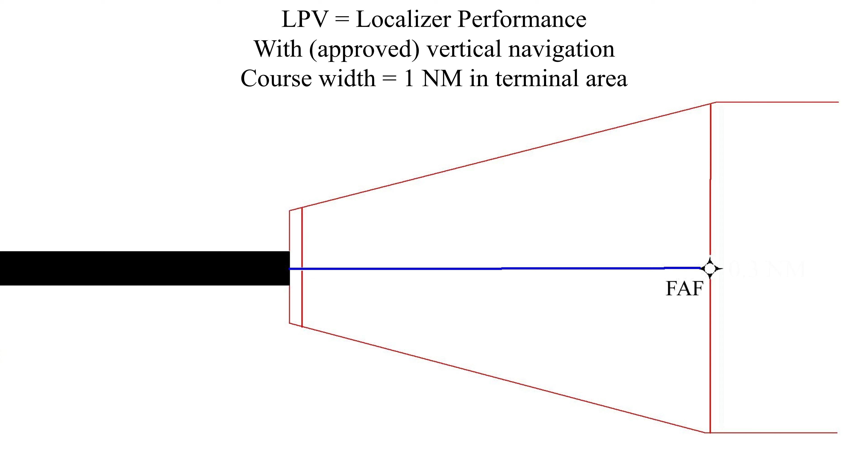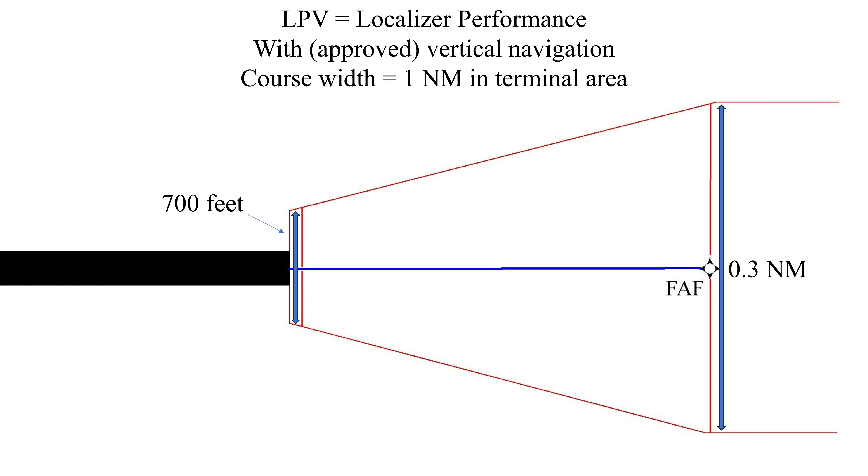With LP lateral guidance, the course width narrows as you get closer to the runway. It starts at a width of 1 nautical mile when you're in the terminal area, which is any time you're within 30 nautical miles of the departure or destination airport. It narrows down to 0.3 nautical miles either side of the course when you get within 2 nautical miles of the final approach fix. At the final approach fix, it gradually narrows to only 700 feet wide at the runway threshold. This mimics the sort of sensitivity you'd get flying an ILS localizer, hence the term localizer performance.

Since you get very precise lateral guidance to the runway, as well as a GPS-generated glide path, this makes it very similar to the guidance you get on an ILS approach. So you basically fly it the same way you would fly an ILS approach, following the lateral and vertical guidance from the GPS down to a decision height, where you either get the runway in sight and proceed to a visual landing, or you don't and execute the missed approach.

With this precise lateral and vertical guidance all the way to the runway threshold, LPV approaches usually have minimums very similar to that of an ILS, with a decision height as low as 200 feet and visibility as low as 1,800 RVR or 1/2 statute mile, depending on the runway and approach lighting system available. Like an ILS approach, you can fly this by coupling it to the autopilot and/or flight director, or hand fly it using raw data.

To demonstrate flying the approach, we'll conduct a short IFR flight from Pine Bluff Grider Field in Pine Bluff, Arkansas. The identifier for that airport is Kilo Papa Bravo Foxtrot, to Stuttgart Airport in Stuttgart, Arkansas. The identifier there is Kilo Sierra Golf Tango. We'll plan to fly the LPV RNAV GPS approach to runway 36 at Stuttgart.

After departing Pine Bluff, we'll navigate direct to Hokum Waypoint, which serves as both an initial and intermediate approach fix for this approach. We'll assume that we request and get clearance to fly the approach straight in without flying the procedure turn at Hokum, using it as an intermediate approach fix.

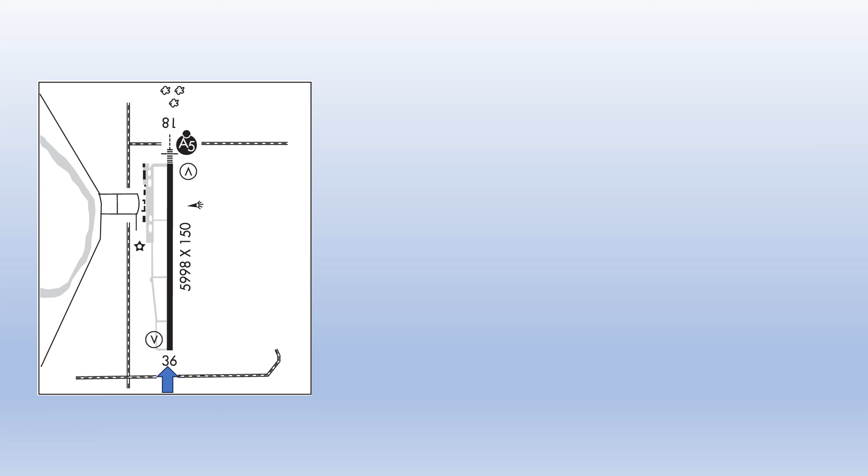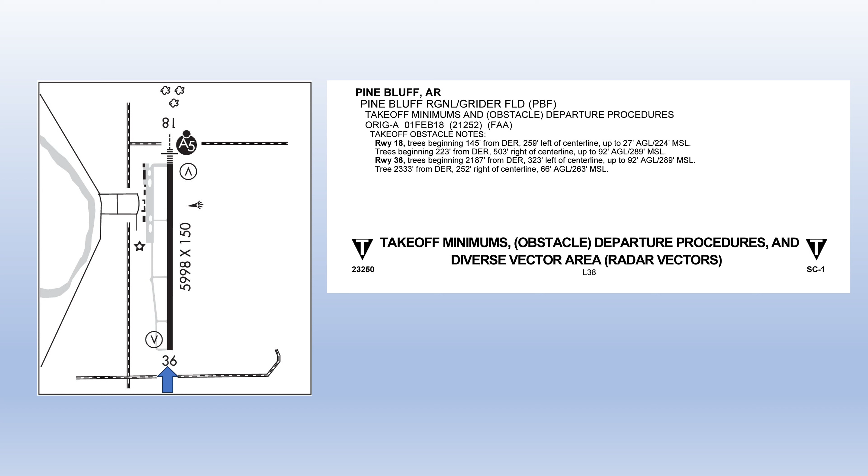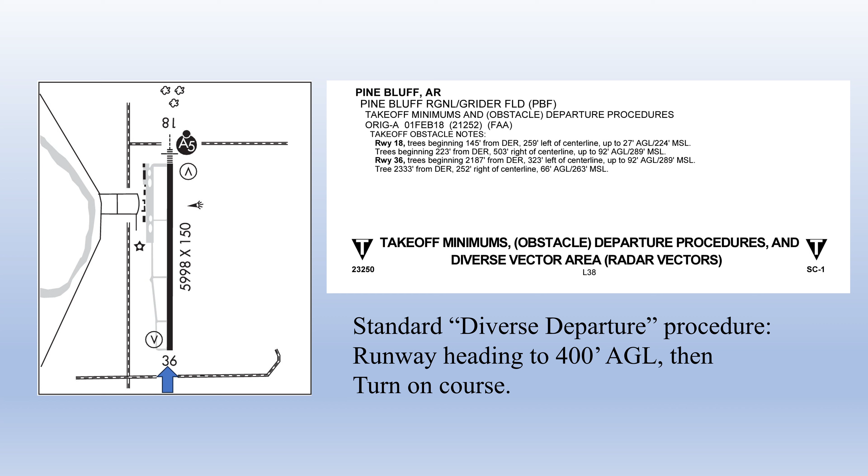We'll plan to depart runway 36 at Pine Bluff. We've checked the takeoff and departure procedures for Pine Bluff. There are takeoff obstacle notes, but no special departure procedures and no takeoff minimums. So we know we'll be safe using the standard diverse departure procedure of flying runway heading to 400 feet AGL before making a turn on course. We'll assume the weather at Pine Bluff Airport is good enough that we can get back in and that we feel comfortable departing.

The weather at Stuttgart is reported as calm winds, 1 mile visibility, ceiling of 300 overcast, temperature and dew point of 15 degrees C, and an altimeter of 2992. We'll assume that we filed an alternate for the flight and that it is a legal alternate. We'll also say that there is a NOTAM for the approach lights to runway 36 being out of service, since they appear to be missing in Microsoft Flight Simulator.

All right, so let's take an in-depth look at the approach and the approach plate to make sure that we are familiar with all the information that we need to know to fly this approach.

Over the top right-hand corner, it gives the title of the procedure. It is the RNAV GPS to runway 36, and it is for Stuttgart Municipal Carl Humphrey Field in Stuttgart, Arkansas. It's got the identifier, the FAA identifier there of SGT, and the top left tells us that this is in Stuttgart, Arkansas, is where the airfield is located.

Top left of the briefing strip here, it gives us some WAAS channel information. I think they just stick this on here because on like an ILS approach or something with a ground-based nav aid, this is where you put the frequency for that type of approach, so they felt like they needed to put something in here. There's not really anything that we can do with this as a pilot. It's not like we can change the WAAS channel, so it's just there for informational purposes only. There's not really much we can do with that.

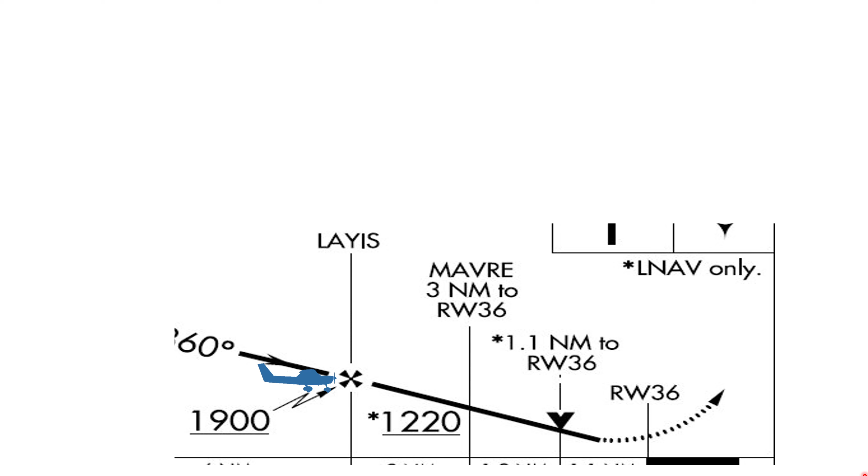So looking at the way we're going to fly the final segment of the approach, we're going to use the low speed technique. Once we get about 3 miles from the glide path intercept, which will be 3.0 distance from LAYIS intersection on the GPS, we're going to configure for our approach.

We'll bring the power to 1800 RPM, hold our altitude and allow the aircraft to slow. We should already be below 110 knots, but if not, we'll let it slow to below 110 knots and put the flaps out to 10.

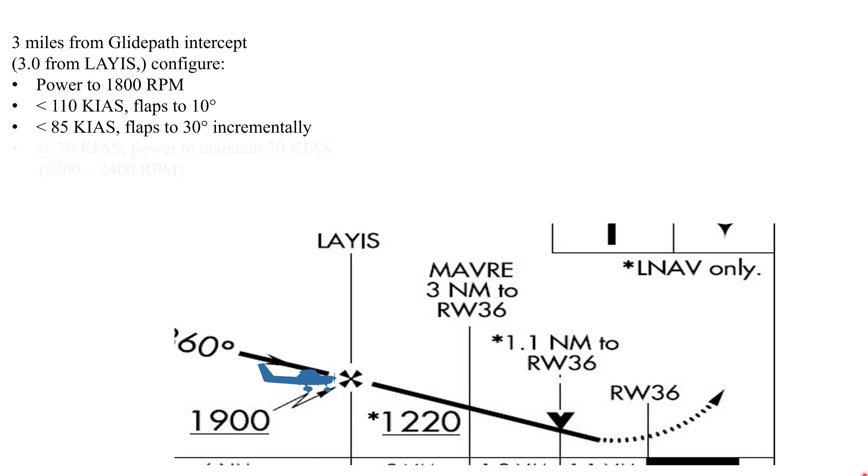Once we're below 85 knots, we'll bring the flaps one notch at a time down to 30 degrees. Then once you're at about 75 knots is when you want to bring the power back in, increasing it to about 2200 to 2400 RPM. If you do it at 75 knots, once you get to 2400 RPM, that should get you stabilized in level flight at 70 knots.

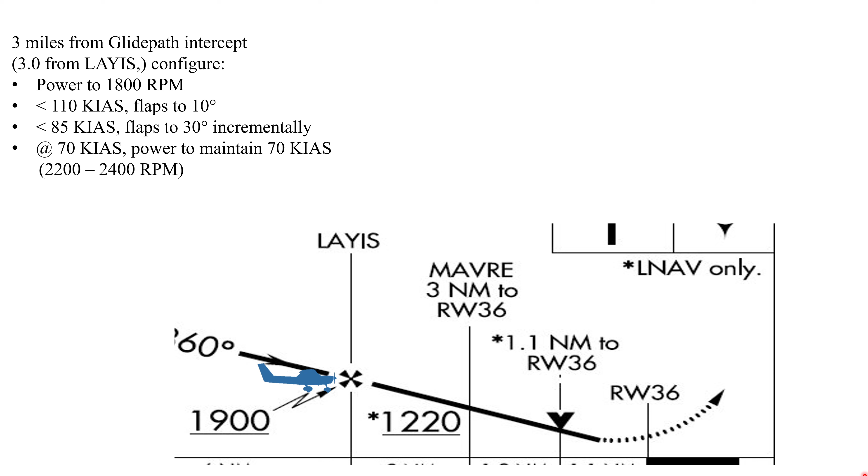We use 70 knots as the approach speed, so you want to lead that application of power just a little bit, about 5 knots. Once you're stabilized and in level flight at 70 knots, you should have a mile or two before you hit the glide path intercept.

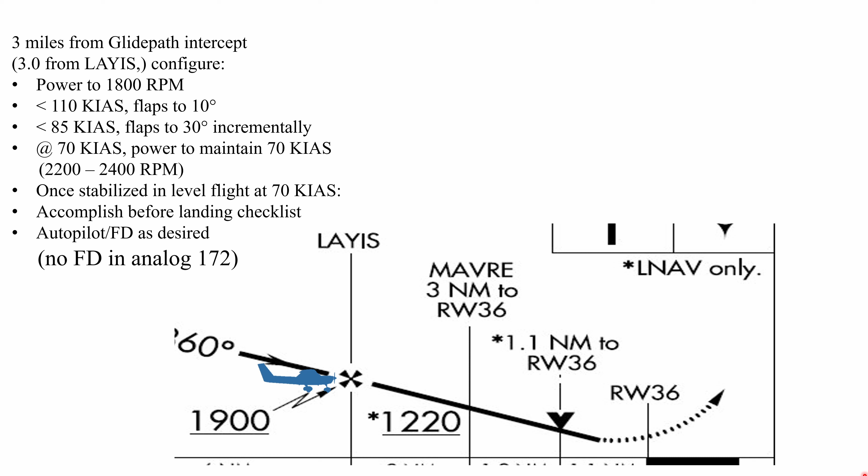You want to go ahead and accomplish your before landing checklist at this point, and decide what you're going to do with the autopilot and flight director. If you want to fly it with raw data or with the autopilot off, this is a good time to kick those things off.

Once you intercept the glide path, you'll reduce your power. 1800 to 2000 RPMs should get you the descent rate that you want, about 400 feet per minute plus or minus to track that glide path. Then make small changes in pitch, power and heading to track the lateral guidance and the glide path.

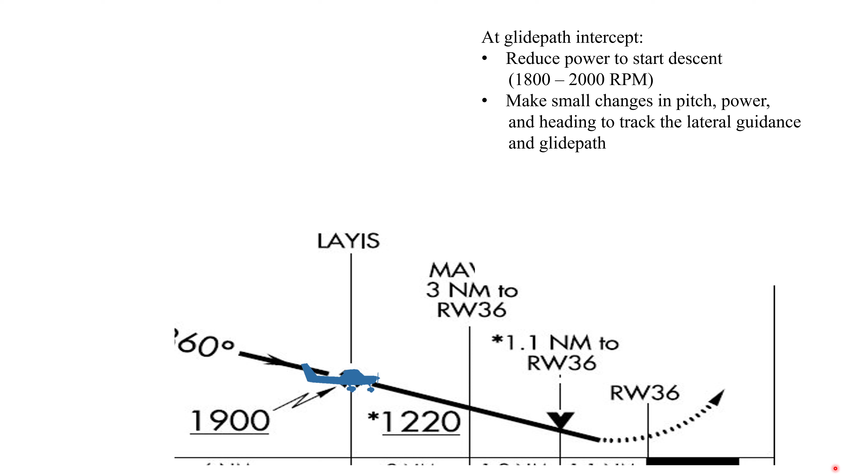Just like flying an ILS, make very small corrections left and right and very small changes in your descent rate to keep that lateral guidance and the glide path centered up. Track the guidance and glide path down to that decision altitude of 474.

Once you get to the decision altitude, you'll either transition to a visual landing once the required visual cues are in sight, or you'll execute the missed approach when it's appropriate.

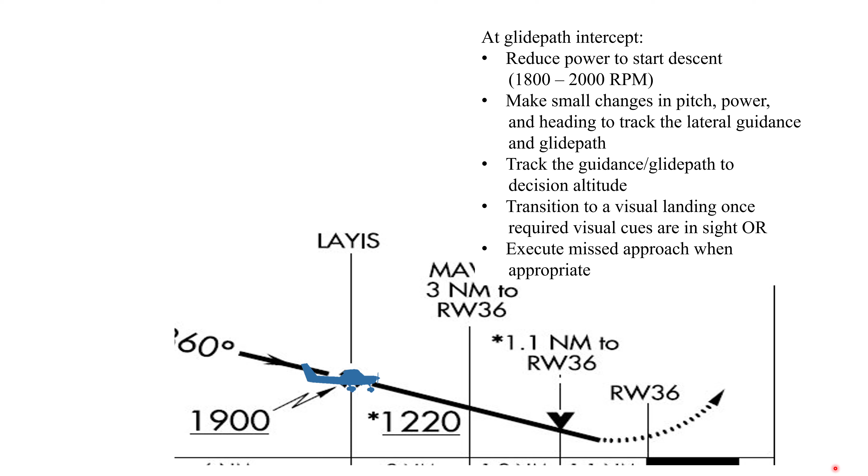A little reminder about when you should go missed approach on an approach with vertical guidance. If you do not have the required visual references in sight when you get to decision altitude, you need to go missed approach.

If the required visual references are lost after you've descended below decision altitude — you had everything in sight, but then you go into a fog bank or whatever and lose it again — you also need to go missed approach at that point.

Anytime you get a full-scale deviation on the lateral or vertical guidance without the runway environment in sight, you need to go missed approach.

On a check ride, you're only allowed a 3/4 scale deflection on the lateral or vertical guidance before you need to go missed approach. If you go beyond 3/4 scale deviation on a check ride, that is considered a bust if you don't go missed approach.

If the approach becomes unstabilized, if your descent rate becomes too high or your airspeed becomes too fast, then you need to go ahead and execute that missed approach.

If any required component of the approach or onboard equipment becomes inoperative — there's really nothing that can go inoperative other than the GPS — but if your LPV annunciation disappears and you're no longer in approach mode, then you need to go missed.

Or if you get an integrity warning on the GPS, then you need to go missed. And anytime it becomes unsafe for any reason to continue the approach, in your opinion, then you need to execute that missed approach.

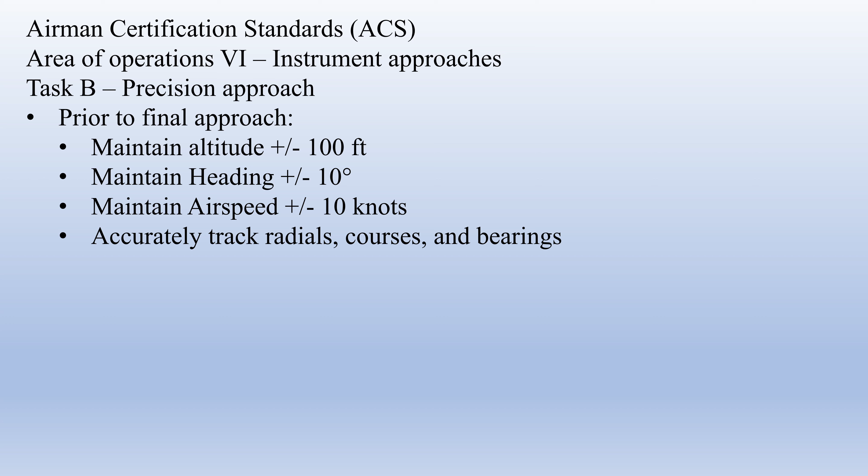The standards are that prior to the final approach fix, you should maintain your altitude plus or minus 100 feet, be able to maintain your heading plus or minus 10 degrees, maintain your airspeed plus or minus 10 knots, and accurately track radials, courses, and bearings. It doesn't give further guidance as to what it considers accurate, but generally that's within 10 degrees or full-scale deflection on a GPS course. We're not using an NDB here, but generally it's within 10 degrees on an NDB bearing as well.

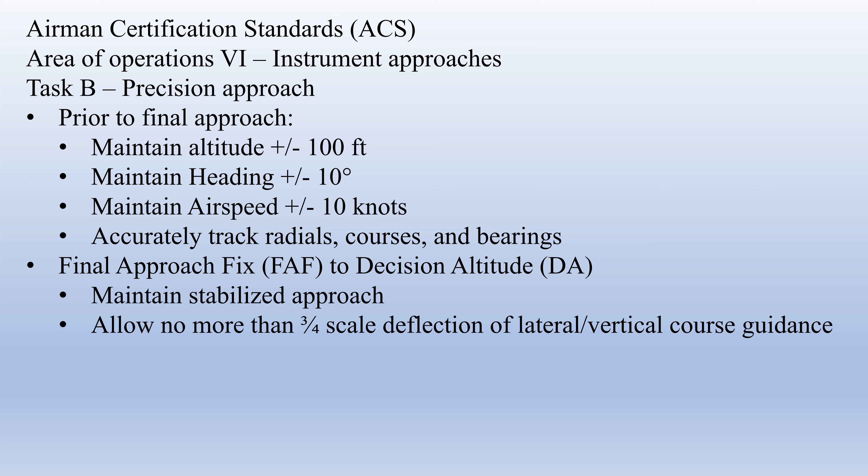From the final approach fix down to the decision altitude, the standards are that you maintain a stabilized approach. They're looking for being on your approach airspeed, no excessive airspeed, and no excessive descent rate, and allowing no more than 3/4 scale deflection of the lateral or vertical course guidance. If you get to 3/4 scale and go missed, rather than trying to continue and accidentally going beyond 3/4 scale, that is not considered a bust at that point. They will generally allow you to go back and try the approach again.

So that's the standard there. If you're actually out there flying the approach, technically you're allowed full scale before you should execute the missed approach, although I would probably tend to execute it before it gets to that point. You should be able to maintain your approach airspeed plus or minus 10 knots, and then immediately miss the approach at decision altitude if you do not have anything in sight, or transition to a visual landing using a normal rate of descent and normal maneuvering.

That concludes this video. Hopefully it's given you the knowledge and skills you need to confidently fly LPV type RNAV GPS approaches using the GNS 530 and 430 on your own.